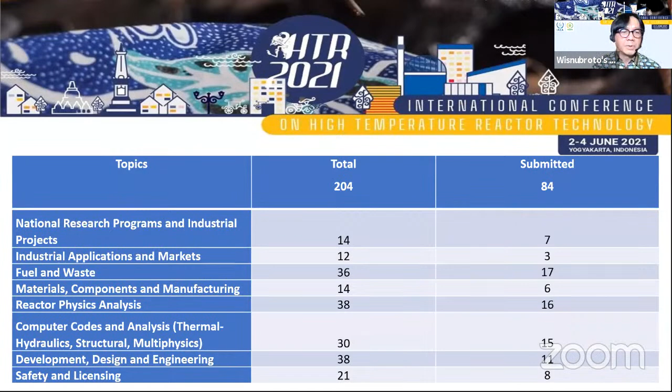I think there are several submitted abstracts that are very popular in the conference tracks. Fuel and waste had 36 abstracts, reactor physics analysis had 38 abstracts, and development design and engineering also had 38 abstracts submitted.

So what kind of publication for the papers? First, we will publish the conference proceedings with ISBN. Second, usually for Indonesian young or junior researchers who want to be promoted to senior researcher, they are required to have papers published in the Scopus Indexed Conference series. So for those interested, papers can be published in the Scopus Indexed Conference series with an additional fee of $100 US.

For selected papers, around maybe 30 up to 50, the best papers depending on the reviewer or track leaders, they will be expanded and published in the Elsevier Journal of Nuclear Engineering and Design. There is also another option for proceeding publication in IAEA.

We also want to conduct a youth competition. The key deadlines: abstract submission August 31st, selection notification in mid-September, and submission and announcement of grand finalists at the end of October this year.

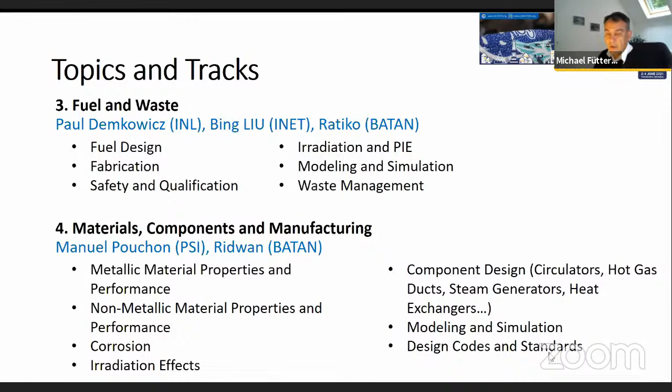Can you see the slides? Yes, we can see. Yeah, I'm sorry, I hit the wrong button. So very important also, we do the modeling and simulations because we want to end up with valid design codes and standards. So that's, I think, a very important track here.

Reactor physics analysis, again a very big track here, led by Frédéric Damian from CEA in France, Jim Kuiper from Nuclic in the Netherlands, and Alexander Agung from Indonesia. Here we deal with nuclear data, the modeling, the simulation, the computations, and then for the full core analysis and also the fuel cycle analysis. So not only the analysis itself, but also the methods and the codes that are involved in this.

Then specifically for everything else, we have a specific track on other computer codes, which covers thermal hydraulics, structural mechanics, multi-physics analysis. Responsible here is Li Fu from INET in China and Topan Setyadipura from BATAN. We talk about thermal hydraulics, methods, code, heat transfer, accident analysis, structural analysis, multi-physics. Specifically for HTGRs is fission and activation product transport, and also vibrations, very important for the operational analysis and sometimes even for licensing.

We have track 7, development, design, and engineering, with Xin Yan from JAEA in Japan and Mohamed Soubekti from BATAN as track leaders. Here the topics are progress in new generation reactor designs, plant dynamics and control, system and facility design, economic assessment, construction methods and experience. So all very practical topics for which we are very happy to receive feedback during the conference.

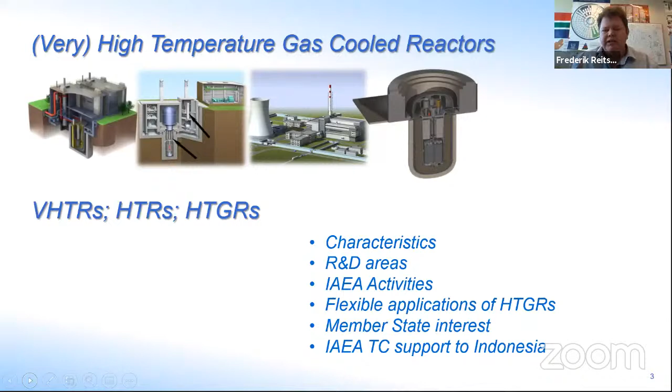A few areas I want to look at: the characteristics, maybe some of the R&D areas, and you'll see it links very well with the topics of the conference. Something on the IAEA activities, a specific topic, a few slides on the flexibility of applying HTGRs not only for electricity, something about the member state interest, and then to conclude, a bit of information on the last 7 years of support to Indonesia, specifically on high temperature gas-cooled reactors through the technical cooperation mechanism.

So the characteristics - this is very familiar. The main thing that distinguishes high temperature gas-cooled reactors from other reactors is really the use of this coated particle fuel. That's a main characteristic. This is then supported by high temperatures, typically 750 degrees outlet temperature of the coolant. Coolant being used is helium. All cases are graphite moderated. And all of them qualify as small modular reactors because electricity generation will be less than 300 megawatt electric. The maximum design being proposed today is only up to 600 megawatt thermal - really small compared to the current large reactors deployed.

Modular reactors really comes from the multiple modules to be deployed, and is really a term that was already in the late 80s pursued by the HTGR community. Other characteristics are really the very low power density of say between 3 and 6 watt per cubic centimeter, and this is typically 10 to 30 times lower than for current large light water reactors. That brings particular benefits, but also some disadvantages, as I will shortly explain.

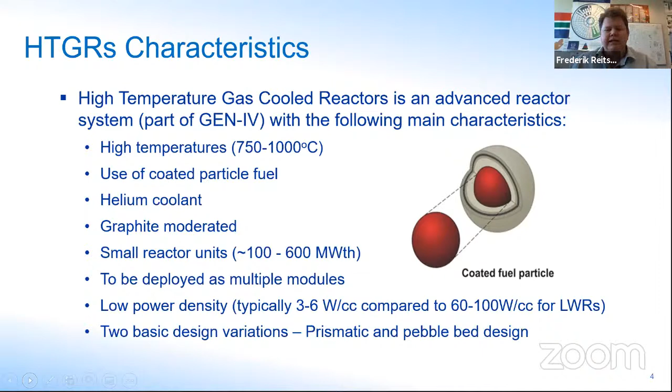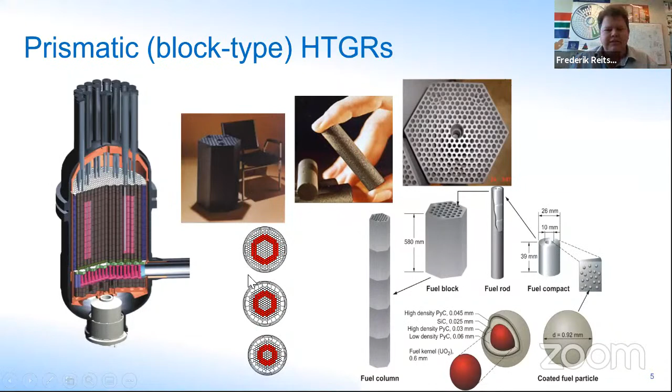We typically have two families of high temperature gas-cooled reactors: the Prismatic and the Pebble bed design. Looking at a typical Prismatic design, or block type reactor, it uses the same coated particles mentioned before, but these are placed in compacts that can either be in a fuel rod or directly inserted in channels within a graphite block. You get rows or pins of coated particles with a filler introduced into the block, and then you can stack several of these blocks in different configurations in a modular design, from a small cylindrical core to a small annular core to a large annular core for different sizes and powers of reactors. So this is typical of block type reactors.

And then the Pebble type, same coated particles again, but this time introduced into a billiard-size ball or sphere, with a small region outside not containing these coated particles. We need to put hundreds of thousands of these pebbles within the cavity of the reactor to form the core. The advantage of the pebbles is that they can be circulated and handled online individually, therefore being circulated through the core in a pebble bed reactor. There are different options - you can also let them only pass through once, but there are variations. The main thing is that you have a small entity that's easy to handle and that you can do this online. So these are the two main families.

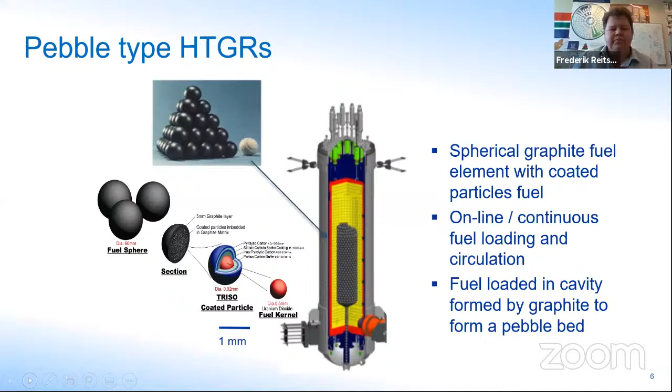Some benefits: just because of the higher temperatures, the 750 outlet for example, you can get much higher efficiency if you choose to use this heat for electricity generation. You can use the same power turbines as for, say, the coal or thermal industry, and therefore increase efficiency to the low 40%. If you then go to a direct cycle, you can probably increase it to 50%. Compared to current large light water reactors, this is where this 20 to 50% increase in efficiency comes from. So for the same thermal heat, you can generate more electricity.

Because also of the higher temperatures, you can participate in the complete energy market. So not only use the heat for electricity generation, but specifically there's a lot of interest and potential to use it for process steam for the petrochemical industry, specifically in the short term, and in the longer term, a lot of interest for hydrogen production. This is a huge market. I will later show a few examples.

Then the HTGRs have this improved safety characteristic, mostly because of the very low power density. It means that after-heat or decay heat, after I shut my reactor down, can be removed by natural means only, and therefore that things like core meltdown or massive damage or release of fission products can be excluded. This has other implications - for example, that the emergency planning zone can probably be shown to be at the site boundary, and that no actions are needed, or the specific EPZ can be reduced in size.

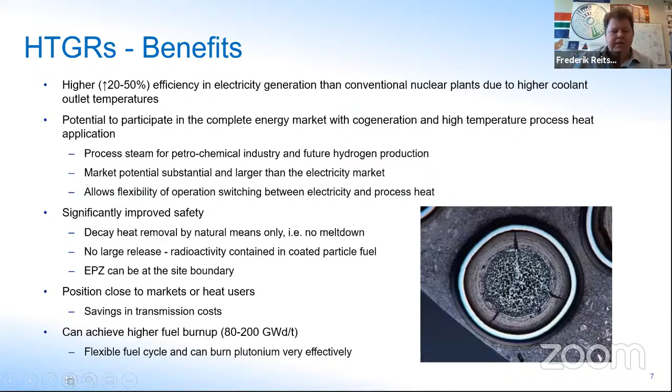So some of the challenges, of course, because we want to use helium as a coolant, and helium is a very light gas, we have to have it under very high pressure to get enough heat removal density. Also, since we want to use a low power density, we need quite a large reactor vessel, so a bigger volume of core.

Of course, helium is a gas and is therefore non-condensable. So you can't use traditional containment concepts, and therefore need to find other solutions and means than the traditional large reactors.

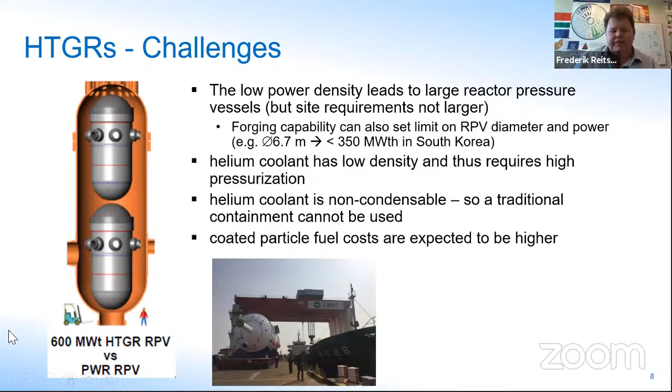And this is not a fact, but in principle, the coated particle fuel is quite complex to make, and even if you make it in very large numbers, you might expect that the cost of the fuel will be higher than for current reactors.

But I think just to emphasize the safety again, this is the main very important feature of high-temperature gas-cooled reactors, and all the designs currently being pursued fulfill this requirement. So I have my coated particle fuel.

This has specific characteristics, with several layers around the inner part, that's the uranium dioxide or uranium carbide, or UCO, and then around it a porous buffer layer and 3 different dense layers. Silicon carbide is one of these dense layers, and their function is to keep most of the fission products within this coated particle under all thinkable conditions so they can't escape. So this is the first principle.

Now I need to design a core that can make use of these good characteristics, and therefore I need a typical low power density and a long slender core where my heat removal surface to the outside is quite large compared to my volume, and therefore by all natural means — meaning I don't need my coolant, I don't need the helium, I don't need a pump, I don't need any electricity.

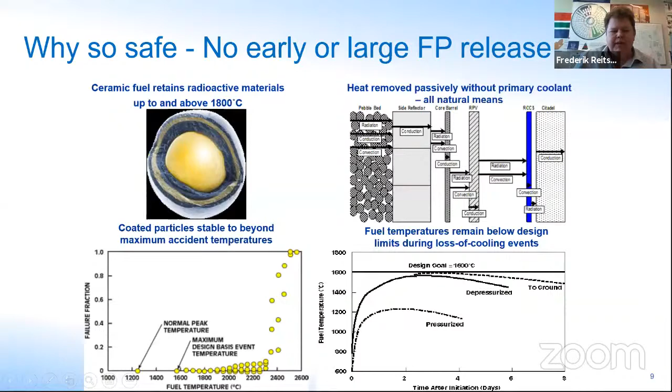So that's why we say no early or large fission product release is possible. And this is really the main concept, to retain all the radioactivity within the coated particles — this is the main safety characteristic of this reactor. There are many others, but I think this is enough to emphasize for this presentation.

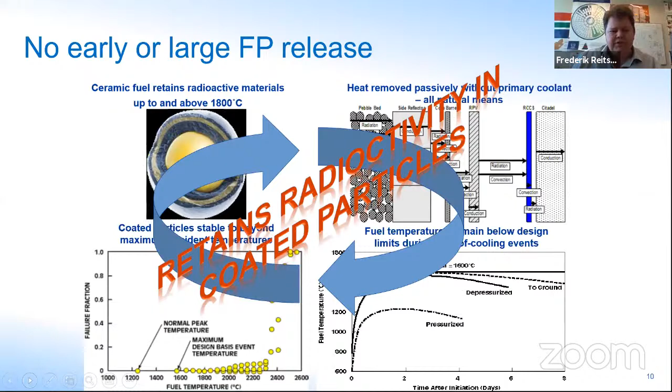So maybe just to summarize the typical safety terrain for modular HTGRs. I think the main message is that the fuel failure mechanisms of this coated particle fuel are really decoupled and totally independent. It really depends on your quality of fuel manufacturing and your maximum fuel temperature reached.

And in case one of these coated particles may fail, it doesn't affect any of the conditions of the surrounding coated particles. So it's not as if it will lead to failure of its neighboring coated particle, because it's all driven only by this maximum fuel temperature.

Also, a failure of one coated particle won't change how the other coated particles are cooled, because it doesn't influence the cool-down path. And if this coated particle fails, the amount of fission products released is very small, so we need billions of them to fail to have any consequence at all.

So this is very important, because it means there's no common mode failure, and there's also no cliff edge effects. No failure of one coated particle will induce multiple failures of surrounding fuel. So it's not like a core meltdown, where if one pin fails, the coolability of surrounding pins might be influenced.

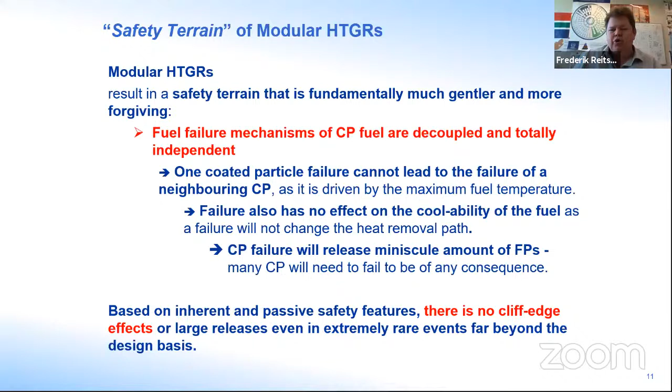So there's no common mode failure or cliff edge effects. Okay, so I think this is enough on the safety terrain.

I want to look at a few R&D areas and highlight some areas where research and development is being done. But first, I want to remind you that HTGRs are not new. High temperature gas-cooled reactors have been built and operated in the past as different projects, not all of them modular, fulfilling the design philosophy as I explained, but using helium as coolant and coated particle fuels in different forms over the years. The main thing is that HTGRs are quite a mature technology with some operating experience, and if conditions are quite moderate, most designers will say no additional research and development is needed.

Only if we really want to go to specific applications and very high temperatures do we need new research and development. But a lot of this knowledge is also in danger of being lost, and we need to preserve and transfer it to the new generation. We also have to make sure that SMR designers, the current designers, actually know and implement the lessons learned from these previous programs.

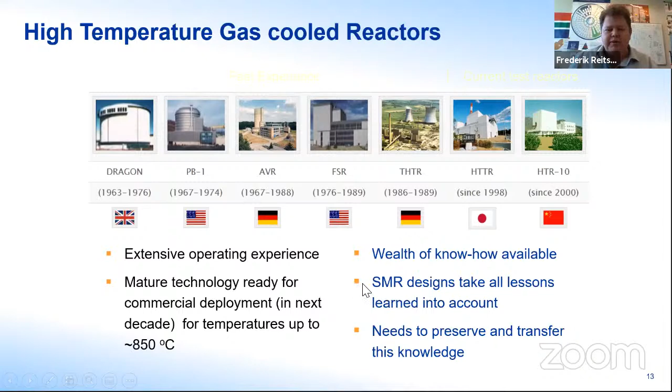So that's very important. Okay, but then some areas where research and development work is being done. For example, GIF have working areas on materials, components, and supply chain, on fuel—mostly advanced fuel—the fuel cycle and waste minimization, design and system integration, cost reduction approaches, safety demonstration, licensing, cogeneration that I already mentioned, and energy system integration.

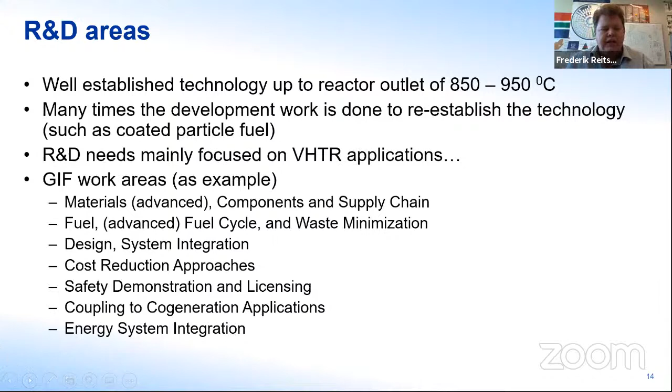For the IAEA, similar areas were identified: fuel again, and fuel performance. On materials, graphite—new graphites need to be developed, since many of the old graphites are no longer available. For high temperatures, we need new high temperature metals, software development, code development, and verification and validation is very important.

The requirements for safety standards have changed over the years, also for codes to be verified and validated. The safety, design, and other safety requirements very specifically have to be interpreted for modular high temperature gas-cooled reactors, and that's another area where work is needed.

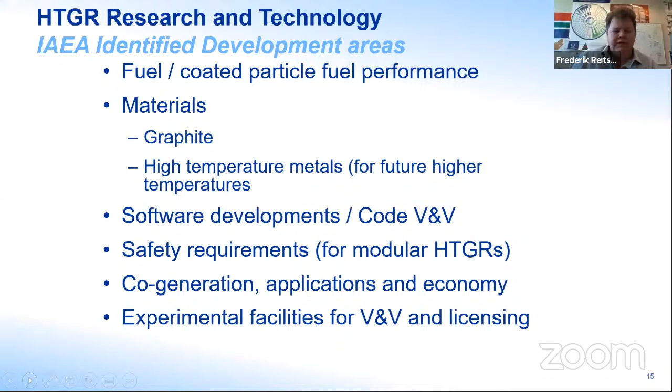Then on co-generation, applications and the economy of these reactors, and finally on experimental facilities for verification, validation, and also for demonstration tests that might be required for licensing. So this is some of the areas that the IAEA has been working on in the past.

Very briefly, some of the latest information—this is not comprehensive, but gives you some idea of the work that's been done. Over the years, many member states have been working on coated particle fuel, initially Germany and the US, but also work done in Japan and more recently in China, as well as Korea, South Africa, and Indonesia, which has been looking at the fuel, for example.

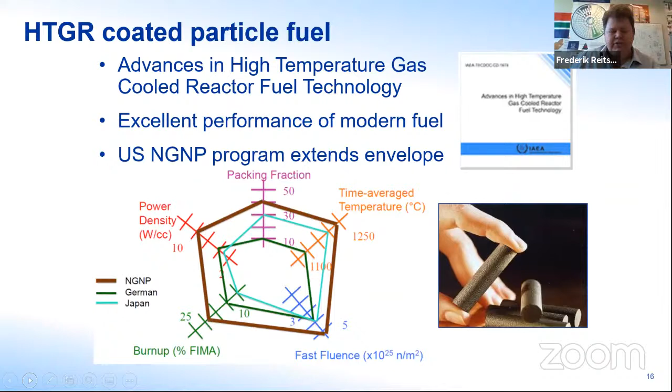Then one example of the retention capabilities of this fuel, also the improvements over the years with different techniques. This is a log scale, 10 to the minus 1 to 10 to the minus 10, and some of the irradiation experiments are shown here, with the typical release of one of the isotopes, krypton-85m, the R/B ratio. You can see how this varied, but the good news is this has reduced, and the latest fuels have very low release fractions.

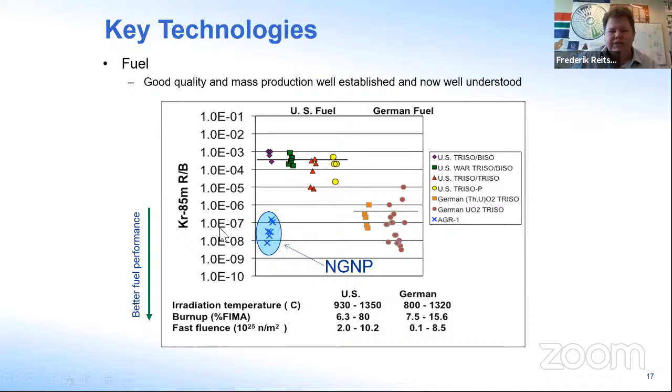Also things like the free uranium loading or contaminants within the fuel have really decreased as we now have modern quality assurance and modern manufacturing techniques. So this is very good news—even the experience from fuel should be orders of magnitude better than the initial experience from the 60s to the 80s.

On graphite, I mentioned there's information available, for example at the agency's graphite knowledge base. New graphites need to be irradiated and understood.

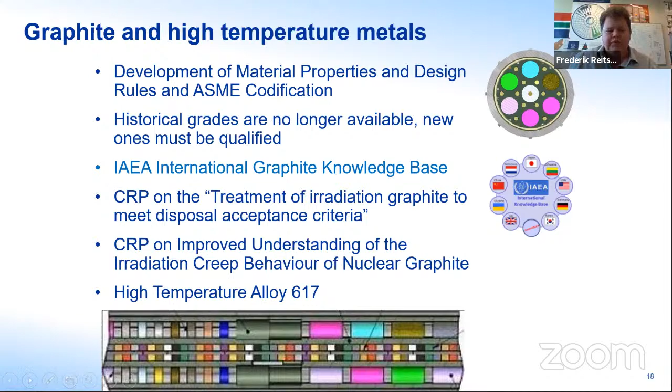There's also the development of new high temperature alloys, for example, alloy 617 - new materials that need to be developed to support future applications.

On the software development side, benchmarking, V&V - this is some of the previous activities the IAEA has done. Recently, we also started a repository, a database on all the experimental facilities and HTGRs. This initiative was started and is to be completed.

But to share information for member states if they're interested - where can they find experimental facilities, what data is available, specifically if you want to do verification and validation.

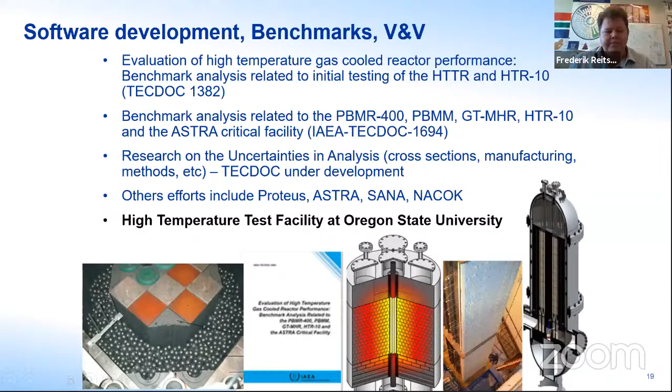This is actually very good news - recent development at the research center Jülich, very well known for the codes VSOP and Tinte and others that they developed over many decades. Unfortunately, due to the close of the German nuclear program in general, their work on HTGRs stopped some years ago, but in the last few years before they really stopped, they'd been actively developing a new code system called HCP - a really modern multi-physics, multi-module code that replaces all the old codes, VSOP, Tinte, and others.

This code system and a large archive of information has been released to the IAEA for free distribution to all interested member states. Together with the HCP code, also the latest VSOP 99.11, and the fuel performance code Stacy have been released, and I'll put the current status here.

As we received it, the VSOP 99 is really ready for distribution soon - it's a mature code with good manuals and so on. Stacy needs a bit of work on the documentation, then it can be released as a standalone module.

And then HCP, which replaces Stacy as a module, and other modules replace VSOP and Tinte. This needs some further development, but we hope to do this under the IAEA open source nuclear code reactor analysis initiative called ONCORE.

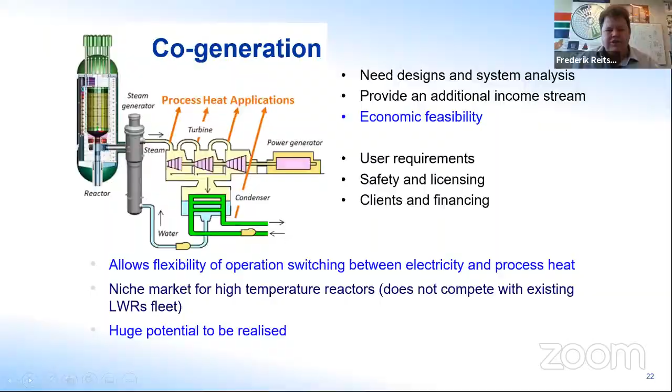So that's a bit of the activities of the IAEA. I see I need to speed up a bit. The IAEA keeps a database, the advanced reactor information system, and recently we updated 11 SMR designs within this database, with quite a number of high-temperature gas-cooled reactors included if you want more information.

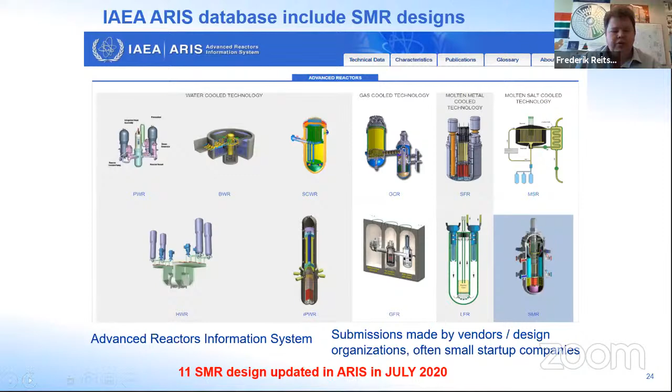And then also for small modular reactors, every two years the agency publishes what we call a booklet, but this has become more like a substantial document.

In the latest release we have 72 SMR and microreactor designs, including high-temperature gas-cooled reactors as always. This will be printed this week and should also be available on the web shortly under the ARIS database.

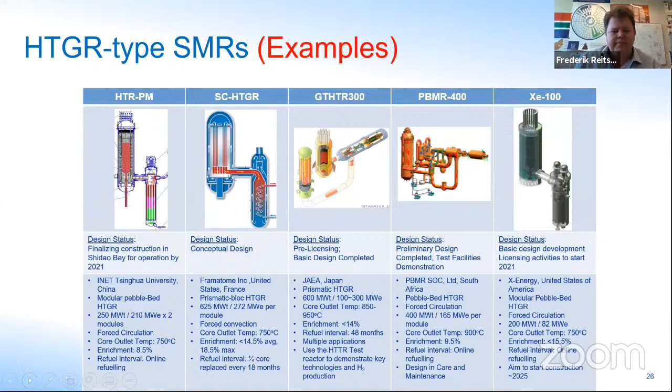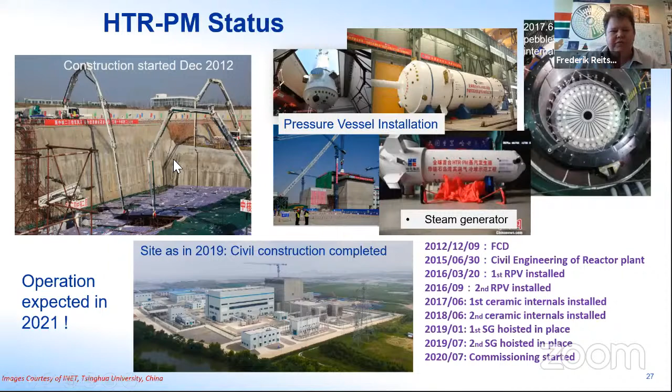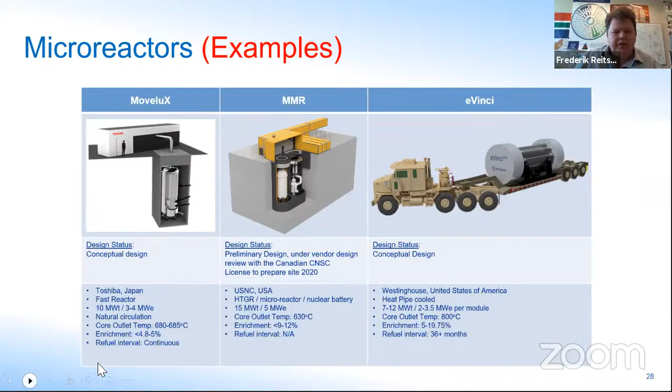Making good progress, for example, is the MMR design from Ultra-Safe Nuclear Corporation, together with Global First Power and Ontario Power Generation in Canada, who have applied to build a reactor in Canada and are currently busy with the environmental assessment. So in this area too, good progress has been made with specific niche applications of these microreactors. That's quite exciting.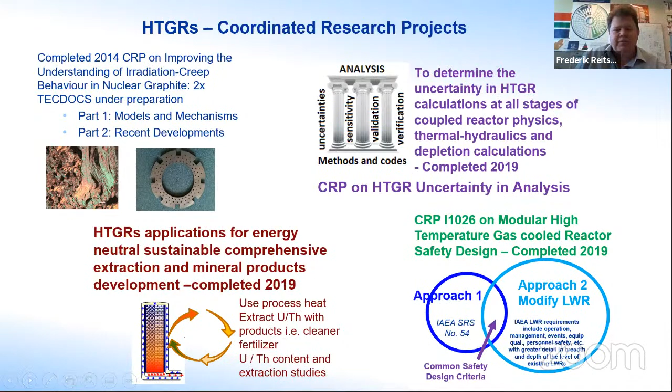So this is some of the information you might expect from the agency soon. And then a new project to be started maybe late this year or early next year on technologies to enhance the competitiveness and early deployment of high-temperature gas-cooled reactors and small modular reactors. There are a lot of ideas on how to use different power conversion units, maybe how to do load follow—what technologies and innovations are available to really make these reactors more attractive in future.

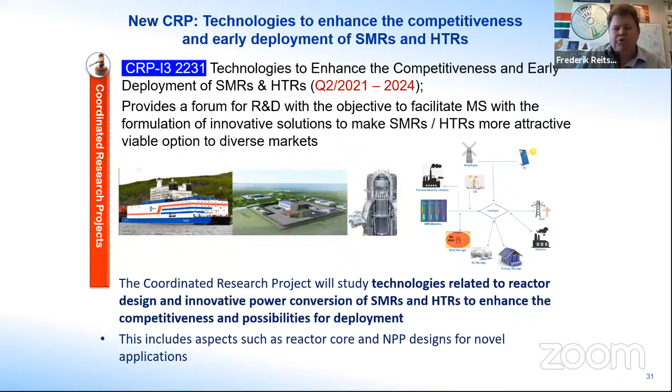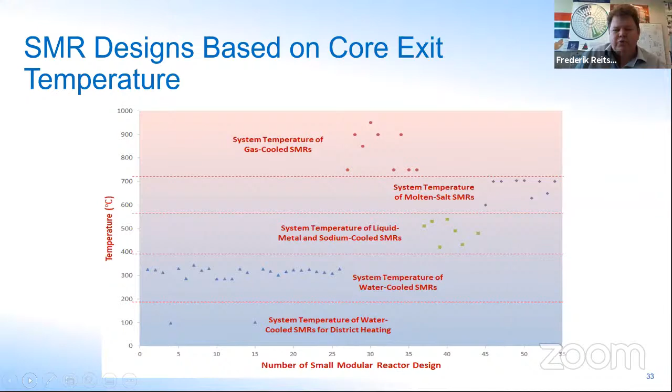So then a few slides on flexible application. Due to the high outlet temperatures I mentioned, there's real potential for high-temperature gas-cooled reactors. You can see it's the highest of all the different types being pursued as small modular reactors. Therefore, we could look at different process heat applications—doing load follow more efficiently by switching between applications, maybe using some of the waste heat for desalination. So this whole idea of different applications being pursued by small modular reactors and HTR specifically.

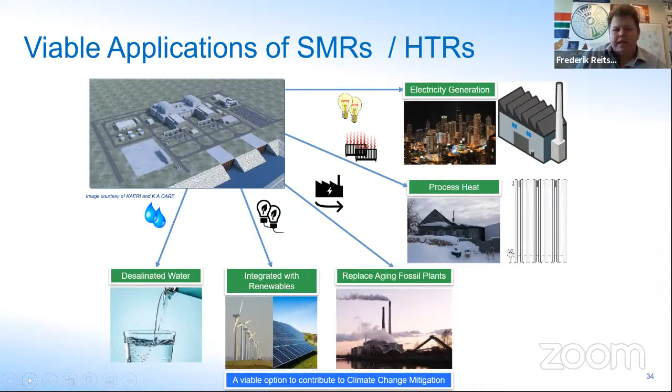We also have a TECDOC under development on options to enhance energy supply security using hybrid energy systems that include SMRs together with renewables. Here are some of the process heat applications that can be pursued to do, for example, load follow to support the intermittent renewables that we know are being increasingly deployed by member states on their electricity grids.

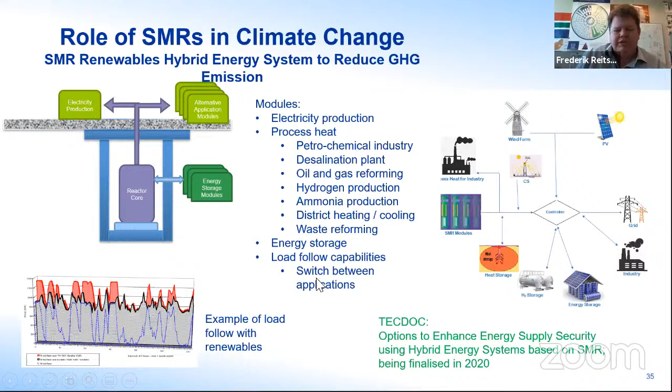This just shows different coupling examples, how heat can be extracted, or different power conversion systems or models that can be used to support load follow and switching between different applications for high-temperature gas-cooled reactors.

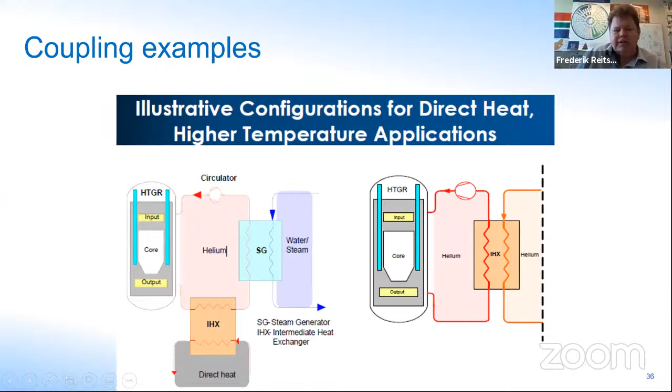First of all, I mentioned the MMR reactor for the Chalk River site in Ontario that's busy with a license application and the site environmental impact assessment. Also in Canada, there are two other small HTRs or microreactors that are in the pre-licensing stages, talking to the regulator. So at least 3 small high-temperature gas-cooled reactors are busy in Canada—very active there.

In China, we know about the HTGR that should start operation next year, but also they already have a design with 6 reactors called HTR-PM600 under development, and several sites are under consideration to build this as the full-size modular application they want to apply in China.

In the UK recently, we learned about the allocation of money for the U-Battery, and this is part of the support for advanced non-water-cooled small modular reactors.

In the USA, X-Energy has been developing a pebble-type high-temperature gas-cooled reactor, and they plan to start licensing in 2021. There's also quite a lot of funding for other activities related to HTGRs, for example to develop TRISO fuel or to develop higher enrichment LEU, the high-assay LEU they talk about in the US. It just means enrichment between 5 and 19.75%.

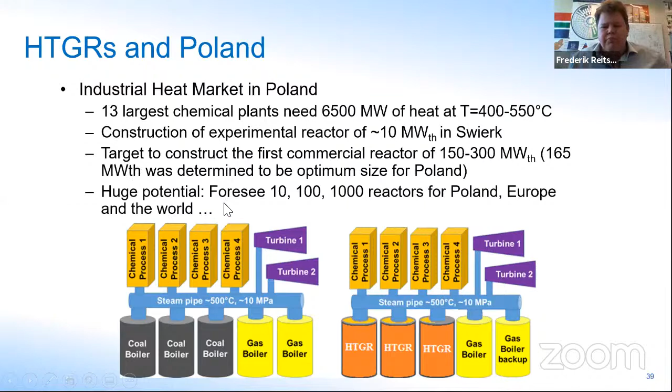Also, they plan to deploy large light-water reactors for electricity generation. This HTGR approach would be complementary, only for process heat, and they also see a large export potential.

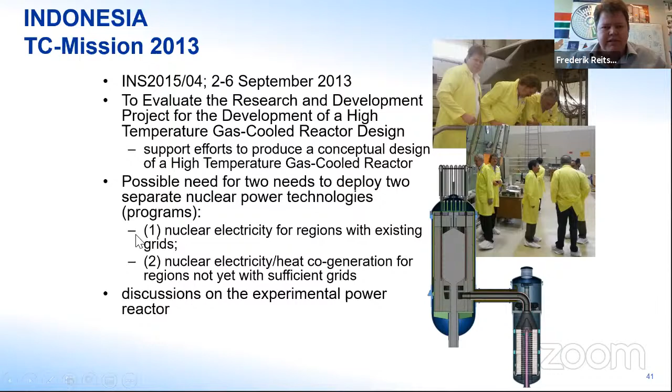For Indonesia, as far as I'm aware, this started in September 2013, so really 6-7 years ago, with a first visit to look at the R&D program done within BATAN on high-temperature gas-cooled reactors, and then the possible deployment of a small experimental reactor was discussed. This was followed up by a letter sent to our then DDG of Nuclear Energy, and a follow-up visit in 2014.

As I said, I'm just going quickly through this. Technical cooperation support started mainly in 2015, including things on HTGR technology and safety, and hands-on training on the different codes - the predecessor of VSOP 99, VSOP 94, and the FLOWNEX code used for HTGR analysis.

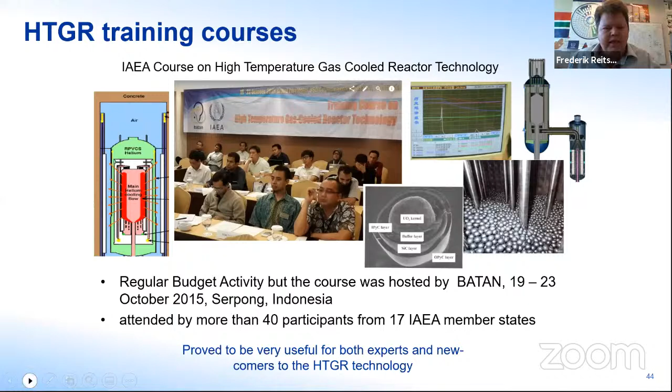Later on, one of the IAEA training courses was held and kindly hosted by BATAN. Also, missions on HTGR fuel engineering, the coated particles - quite a few missions supporting the fuel, how it's made, what procedures should be in place, what quality assurance should be in place, and how the kernel manufacturing is done.

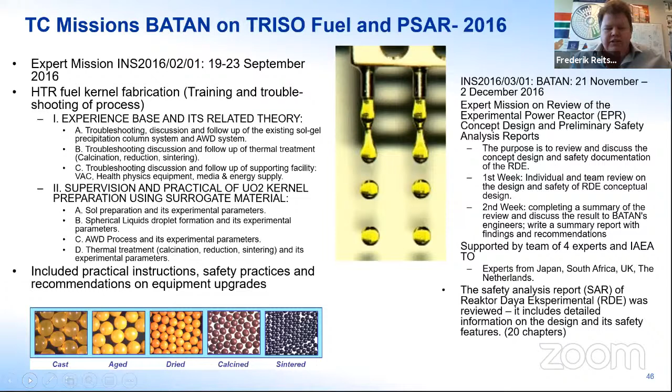Then several missions also looked at the experimental power reactor, evaluating the PSAR that was available, and later this was expanded to look at the additional design work pursued by BATAN. Also, BAPETEN was preparing for the license application, and from their own funds implemented quite a number of activities - scientific visits, looking at different codes, and looking at fuel manufacturing experience, for example.